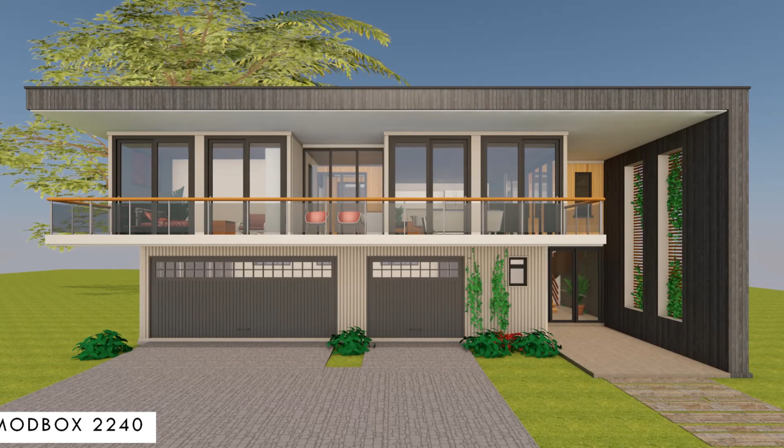We bring to you a design video. In this video, we feature Modbox 2240. This is an amazing shipping container home designed using 7 40-foot shipping containers to create more than 2,240 square feet of habitable space. Stay tuned to find out more about this amazing design.

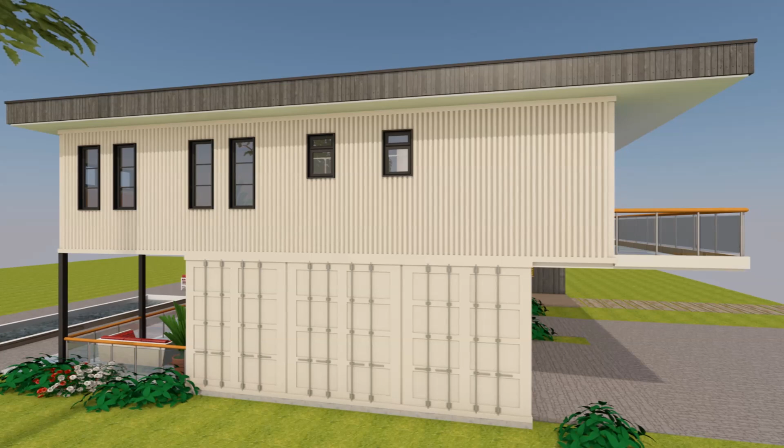Welcome back. In this design, on the ground floor, we have 3 40-foot shipping containers. We are able to accommodate a 3-car garage, a laundry space, and a guest bathroom. This floor is exclusively a utility space. From the car garage, you are able to join the main entrance lobby of the house. The main entrance can be accessed directly from outside or linked with an access from the car garage.

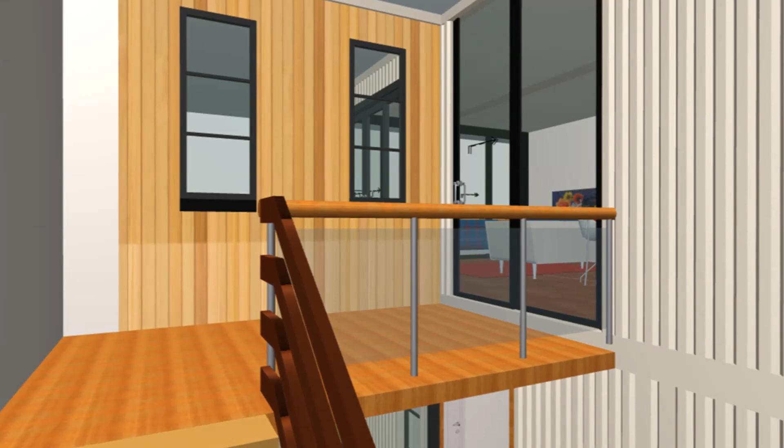From the entrance lobby, you get to the first floor level where most of the living functions of the house are accommodated. On this particular level, we have 4 40-foot shipping containers. The 4 containers on the first floor level are grouped in 2 pairs, whereby 2 40-foot containers comprise the living quarters of the house, and the second pair of 40-foot containers are linked by a walkway to the private section of the house.

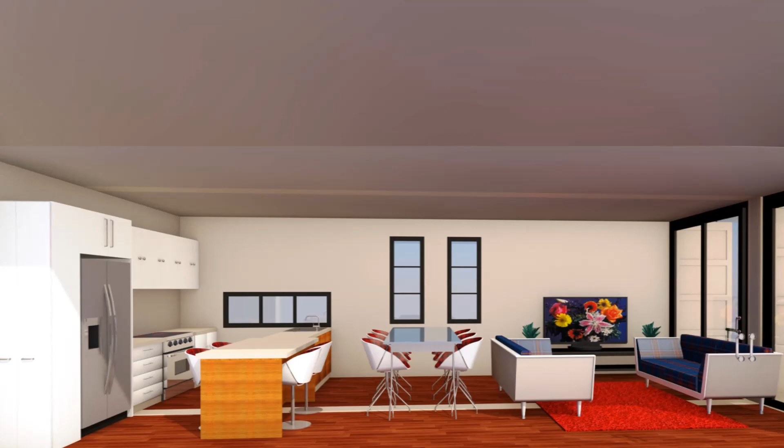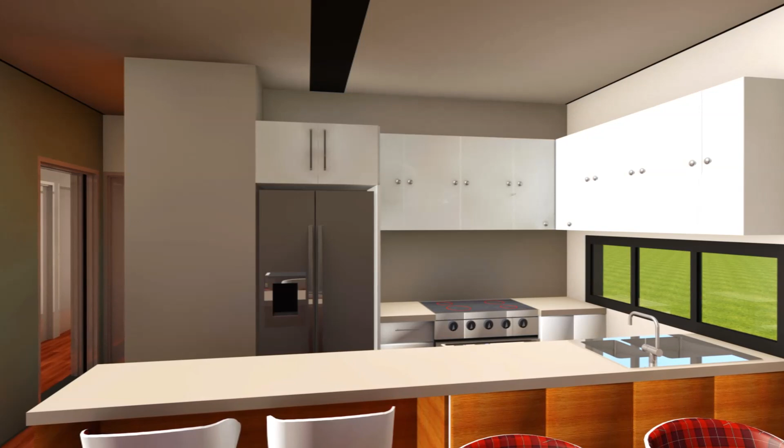On the living quarters, we managed to accommodate an open plan living space that comprises a lounge space, which is big enough to accommodate a set of sofa seats. We have a big dining area that can comfortably seat 6 or 8, ideal for a big family. Next to the dining is an open plan kitchen, which has all the necessary essentials to make the kitchen space functional. The kitchen is also fitted with a horizontal slit window which lights up the sink space to create a bright and well-lit kitchen space.

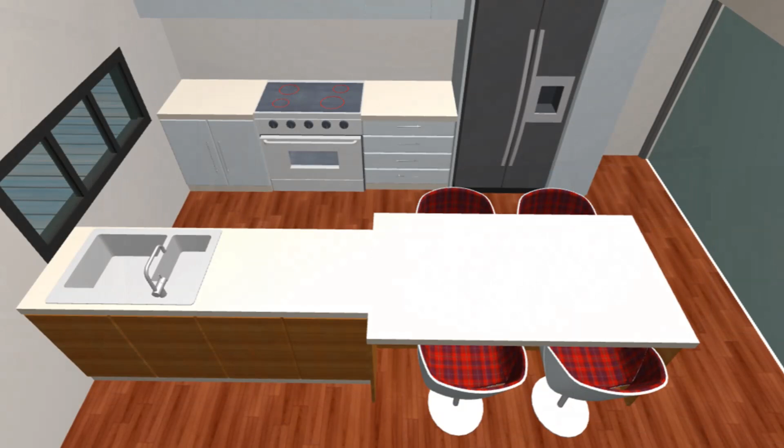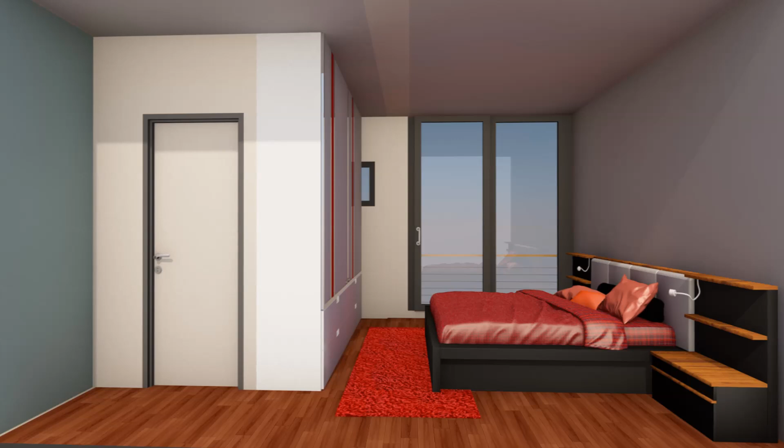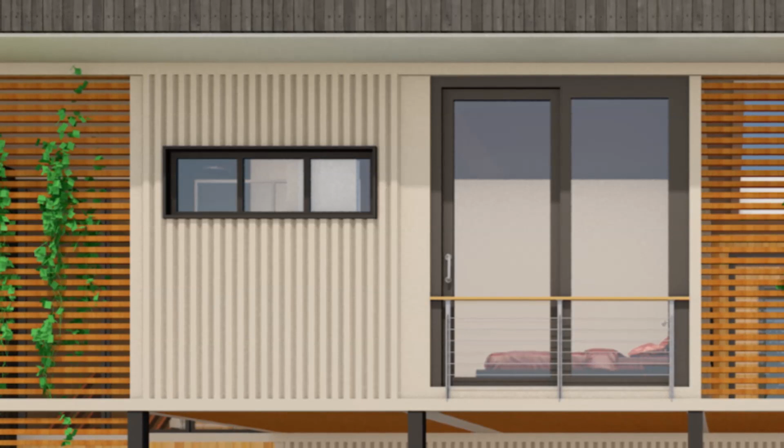The kitchen has adequate counter workspace, including a kitchen island, which is linked to a small breakfast area that can comfortably seat 4 or more depending on your configuration. The living space is spacious and big enough since it occupies 3/4 of the 2 shipping containers. On the extreme end is a small guest bedroom with its own bathroom, plus adequate wardrobe space. The bedroom is fitted with a full-height glass door, which creates a false balcony overlooking the yard or the swimming pool at the rear of the building.

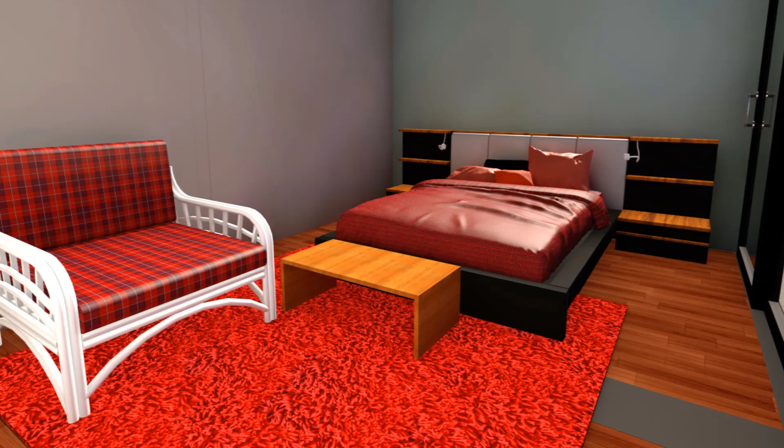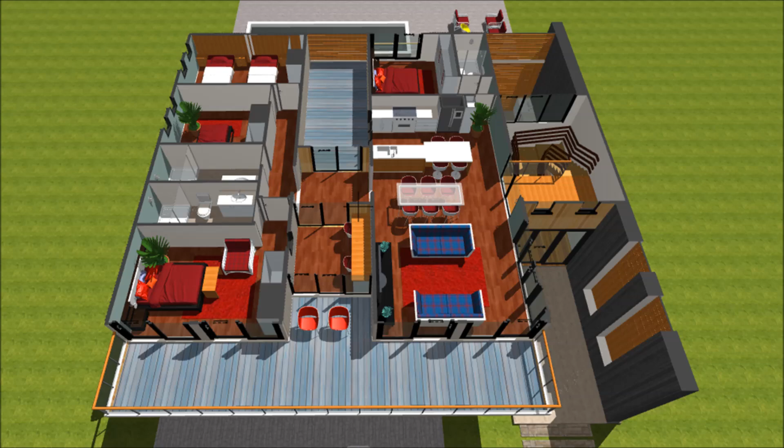The living space of the house is linked to the private section of the house using a glass walkway. The private section of the house accommodates 3 spacious bedrooms. The bedrooms include a big master ensuite with a sizable bathroom, a big wardrobe space, a big bed space that can accommodate a king-size bed, and a small lounge space to enjoy the view. The master bedroom is fitted with full-height sliding glass doors, which are fitted within the docking ends of the shipping containers, creating a big, spacious master bedroom awash with natural light from the sizable glass windows. The other 2 bedrooms are occupied on the rear end of the shipping container modules.

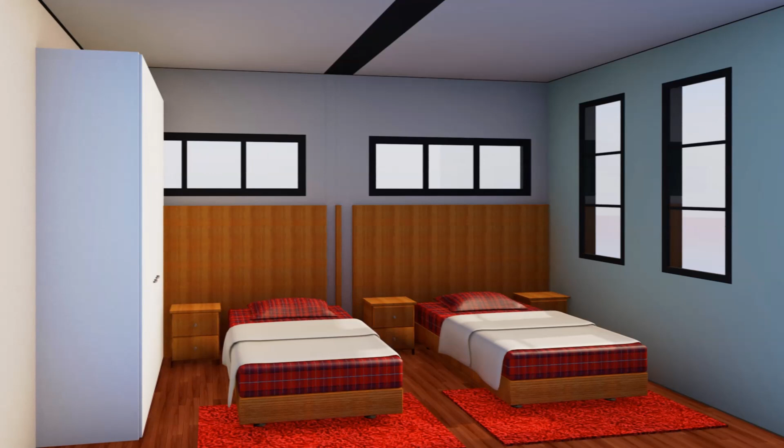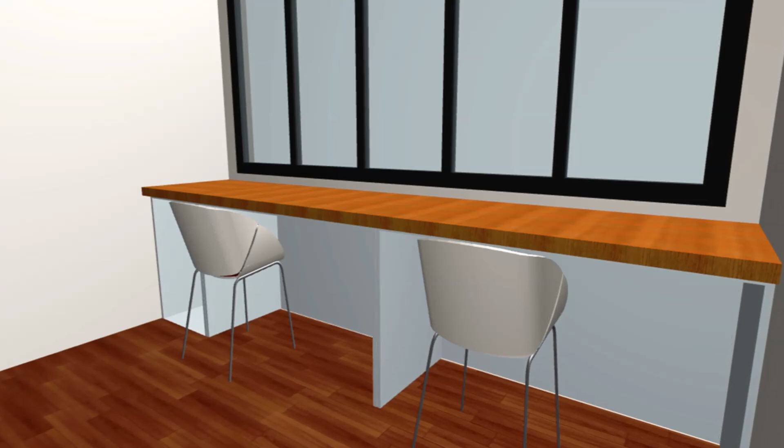We have a small bedroom which can accommodate a single double bed, and a bigger bedroom on the farthest end that can accommodate 2 single beds, ideal for a children's bedroom or a rumpus room. The 2 bedrooms share a common bathroom, which is also easily accessible from the living room. The 2 modules are connected with a glass walkway, which encloses a sizable home office or a study room on the front part of the house. On the rear part of the walkway, we have a kitchen yard, which is open to the sky to ensure sufficient daylighting to the kitchen space.

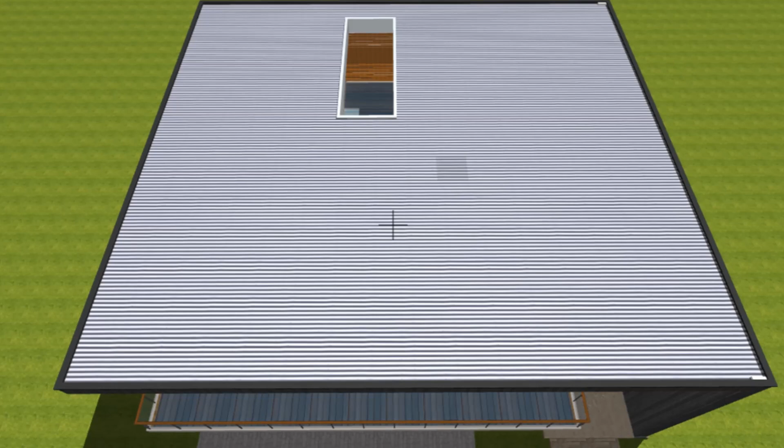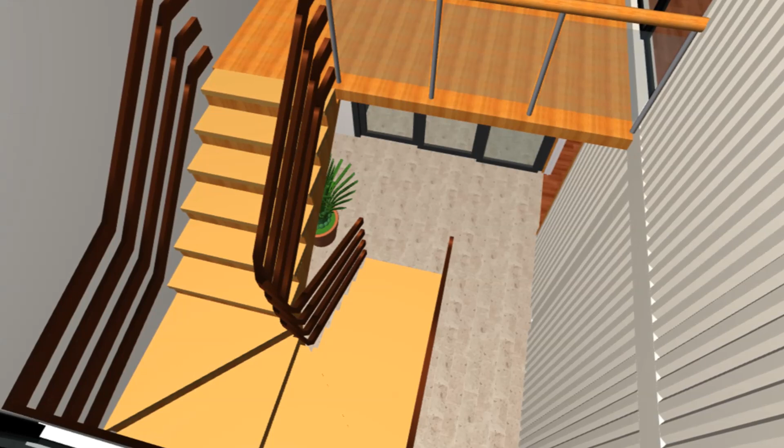We have a big sheltered outdoor deck stretching the entire frontage of the house. The deck can be accessed directly from the living room, from the home office cum study area, or from the master bedroom. To crown up all these 7 shipping containers is an additional module built using traditional materials, which forms the entrance lobby of the house, and they are all linked by a beautiful flat roof, which gives the entire design a sleek modern look. The entrance porch is a double volume space, and it opens into a double volume entrance lobby, which has a U-shaped staircase and is very well lit.

At the rear of the building, we have a double volume space, which acts as a nice space to be used as an outdoor kitchen, ideal for family barbecues and outdoor cooking to enjoy amazing evening dinners and family parties by the poolside. The 4 containers on the first floor level are shifted towards the rear of the building, enclosing a big private outdoor deck, which creates an amazing outdoor space for the family. This amazing space is ideal for outdoor dining, outdoor lounging, family entertainment, and amazing dinner parties by the poolside.

We retained the original container corrugations on every elevation to celebrate the industrial vibe of using shipping containers as building blocks in this particular design. As usual, you are encouraged to use an appropriate insulation material depending on the climate of where you intend to build. If you are building in the tropics, you need to keep away heat from your shipping container house as much as possible. However, in the temperate regions, you are encouraged to use a good insulation material that has good R values and moisture barrier properties to prevent condensation from happening inside your container building.